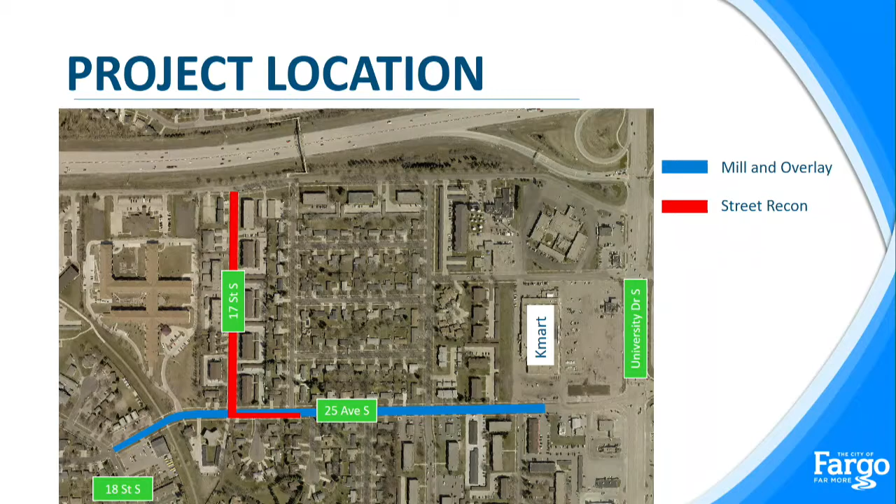So here's the project location, kind of two components. There's a small portion of street reconstruction on 25th Avenue, and then that street reconstruction continues up 17th Street. And then we are performing a mill and overlay on 25th Avenue from about 18th Street nearly to University Drive. So again, like I mentioned, 25th Avenue, partial reconstruction of the street from about 17th Street to 16th Street. And this is to accommodate the installation of storm sewer.

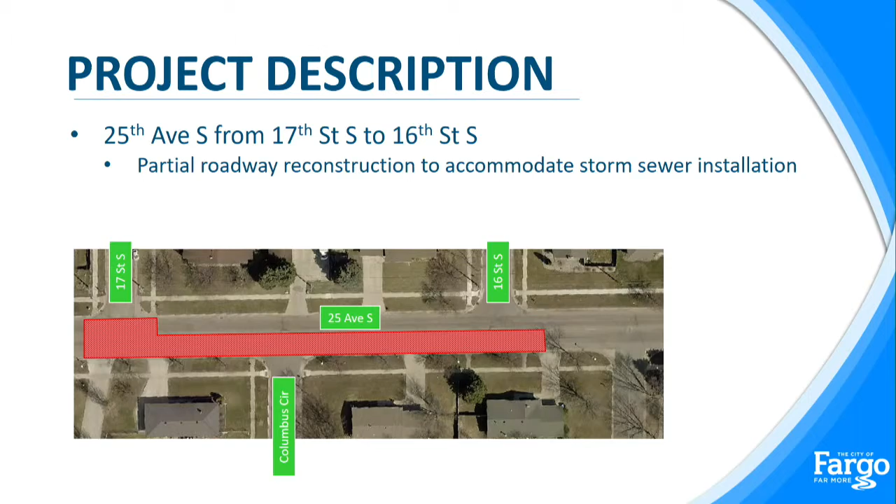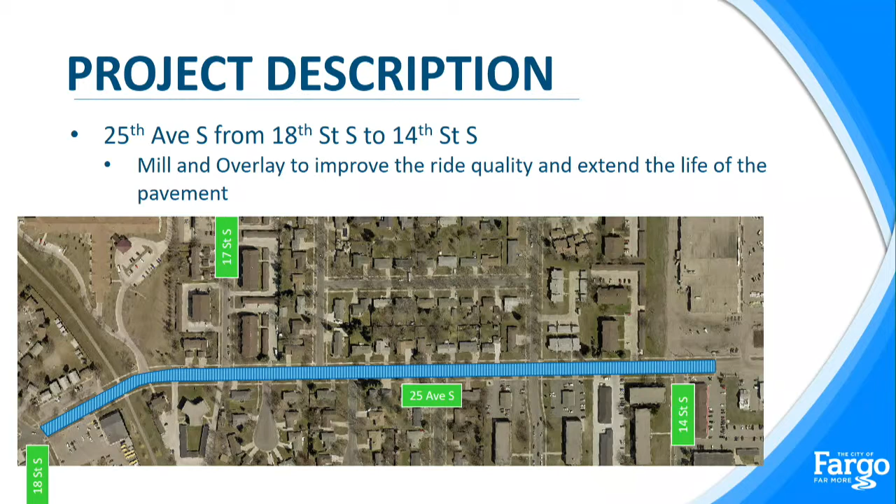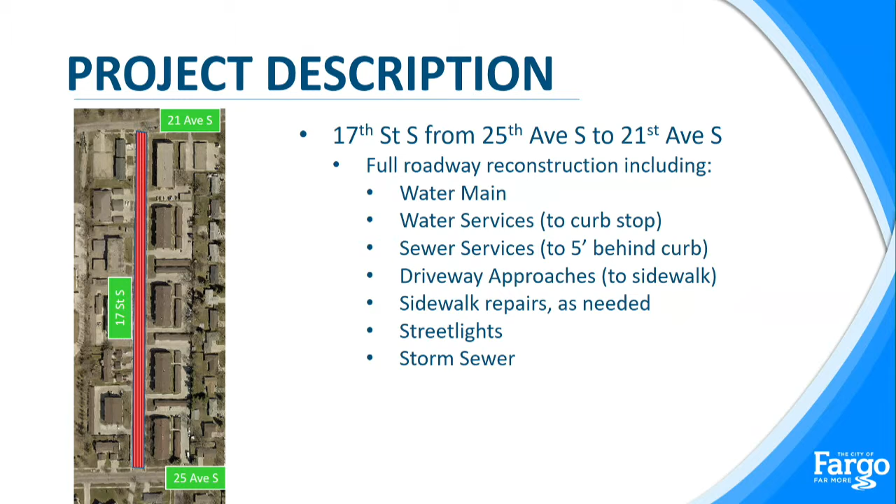Again, on 25th Avenue, mill and overlay from 18th Street to just past 14th Street. That mill and overlay is just generally to improve the ride quality and extend the life of the pavement. So on 17th Street, we are doing a full reconstruction from 25th Avenue South to 21st Avenue South. We'll replace the water main, water services, sewer services, and driveway approaches up to the sidewalk. We'll also do sidewalk repairs as necessary along the project, install new streetlights, and replace storm sewer.

So the project is bid next week, next Wednesday on February 19th. The start date's not known yet. Likely it will be in May of 2020, but once we have a contractor, we'll have a better understanding of when they plan to start, and then we'll communicate that with the public as well. The completion for the project is anticipated to be late September of this year.

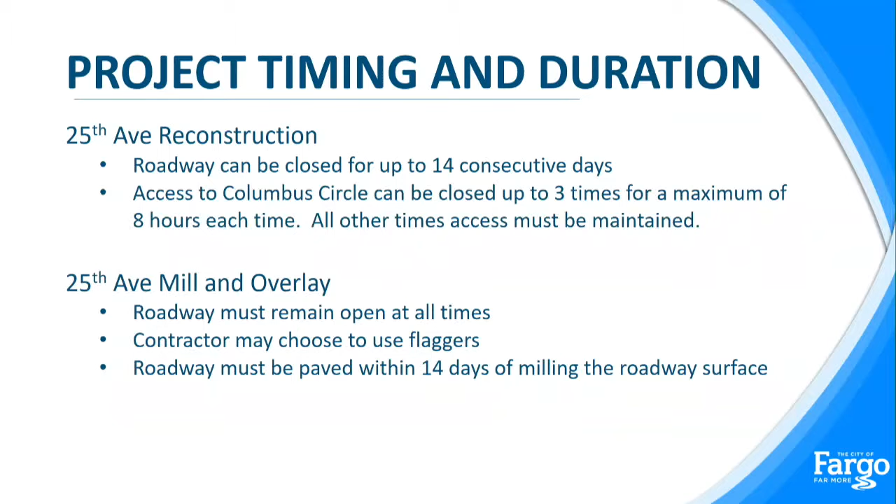So we do have some timing constraints along the project, ultimately to minimize impact to the residents along the area. The 25th Avenue reconstruction portion can be closed for up to 14 days. Access to Columbus Circle can be limited for a maximum of 3 times up to 8 hours each time. Otherwise, it will be maintained. On 25th Avenue, the mill and overlay portion, the roadway must remain open at all times. The contractor may choose to use flaggers for that. And the roadway must be paved within 14 days of when the milling takes place.

And then on 17th Street, it is split into 3 different phases. Each phase is limited to 35 days. Work cannot overlap on any of the phases, so they must do one before they move into the next. And again, it's just to minimize the impact and maximize the available on-street parking for those that will be impacted.

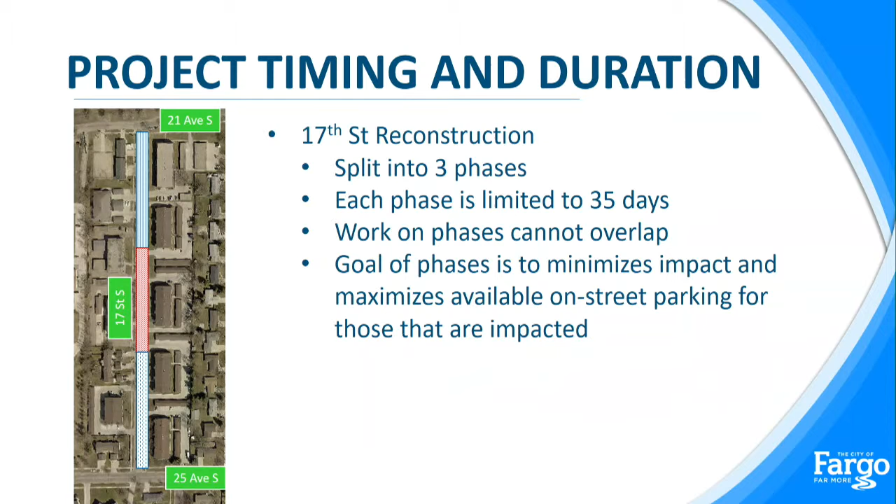So just some project details. The contractor must maintain access for garbage and recycling pickup, or they must pick those up. Pedestrian access will be maintained on a hard surface throughout the project, on one side or the other of the roadway. Temporary water pipes will be strung along the project to maintain water service. Temporary mailboxes will be placed at the intersection of 17th Street and 21st Avenue for residents along 17th Street. Driveways may be widened if it complies with city ordinance. We do have forms available for that if anyone's interested.

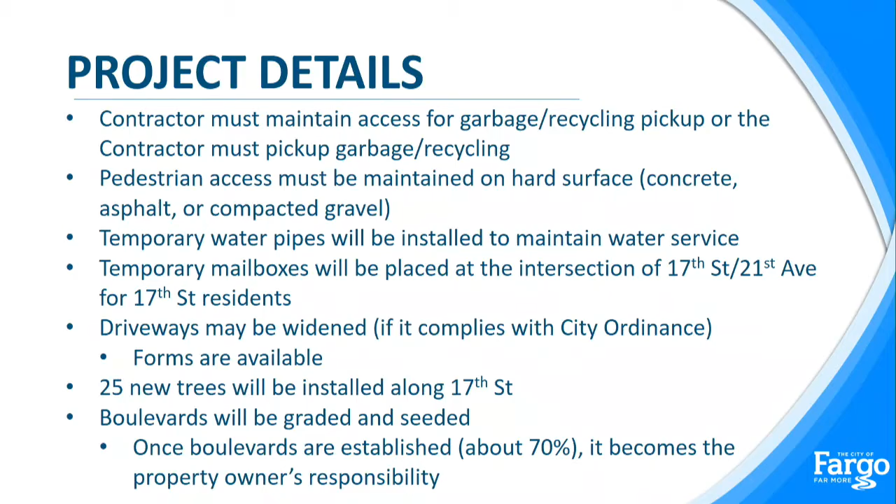So the project cost is estimated at about $1,445,000. There are some fees and contingencies that we add to those project costs, so with that, it's just short of $1.9 million. For funding of that full $1.9 million, about $65,000 is a little bit of work we're doing with wastewater. About $220,000 in water utility. State funds or prairie dog funds is just over $1 million, and special assessments is about $600,000. So it's about 32% special assessed.

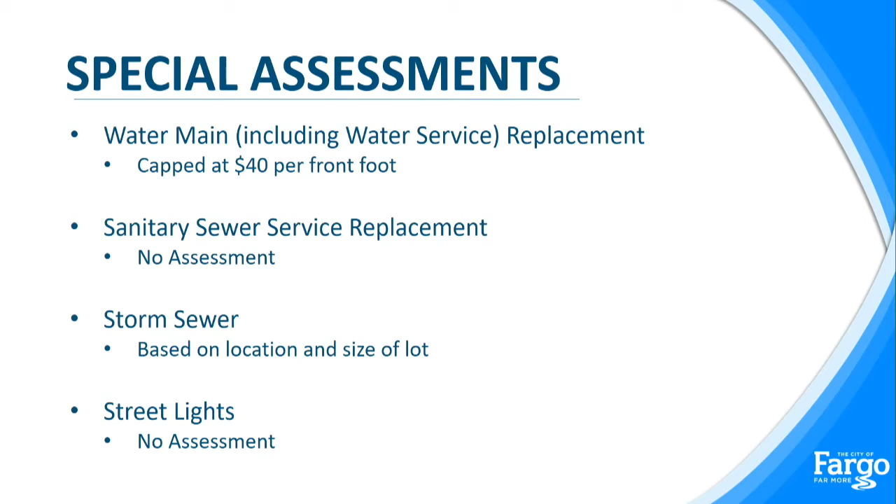So how are those special assessments calculated? Water main, including water service replacement, is capped at $40 a front foot for all the properties. There is no assessment for the sanitary sewer service replacement. Storm sewer is ultimately based on the location and the size of the lot. There is no assessment for the street lights. Mill and overlay is spread to a wider area along 25th Avenue, based on location and front footage. The partial reconstruction of 25th Avenue has no special assessments associated with it.

The work along 17th Street is spread to only those properties that directly front 17th Street. By our special assessment policy, a single family property pays $85 a front foot, and MR tier 2 and 3 pay $130 and $170 respectively. That's what our policy says. We use state funds to buy that down by 50% for each one of those. So a single family property would pay $42.50 per front foot, MR tier 2 is $65 and tier 3 is $85.